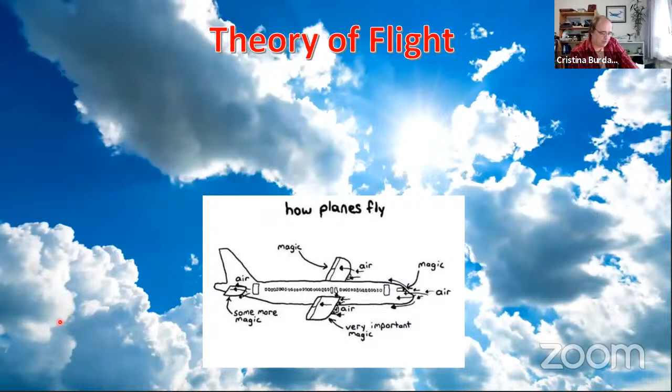Who am I? I work at Pilatus Aircraft Limited. I look after aircraft performance from design, development, certification to operational support. But I'm obviously just one of many, many engineers.

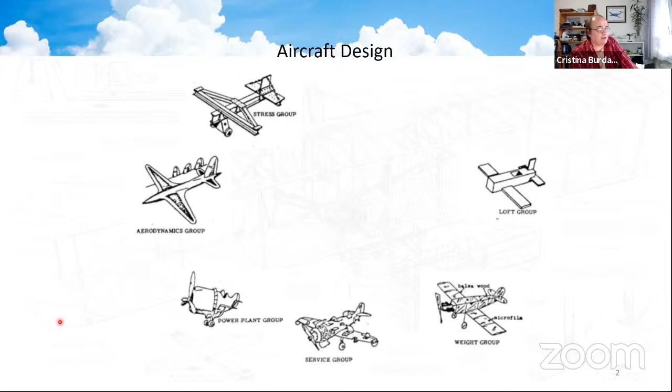In aerodynamics, we love our airplane to be sleek, smooth, rounded, so the air gets out of the way and lets the airplane through. But when we give our drawings to the loft group, they look at what they can draw and produce, and invariably it looks a little different. When the stress group get involved to make the aircraft nice and strong, they obviously prefer something with iron girders, and you can imagine how this sort of builds up. If they have iron girders, it's all heavy, so we need to get the weight group in there to make things nice and light again. So we keep fighting with various groups - it's a cooperation, it's a very difficult birth. As you can see, the power plant group, they only think about one thing. So airplane design is a compromise.

Now, I am presenting this from one point of view only - what you're going to see tonight is from my point of view. I'm not representing the company I work for at all, nor any aeronautical bodies. I got dragged into this by people asking me questions about things getting reported in the press, and I thought it'd be good to get an understanding out to the general population. I thought, Wombwell Historical, where else are you going to get - I thought you guys would actually be quite a good audience for this presentation.

So we're going to talk a bit about the science side. Where I'm going to start is on the subject of lift, but I'm going to touch on the historical part by starting on a grassy knoll in Yorkshire, where the landowner, one George Cayley, who had been studying aviation for decades - many aspects of aviation, he loved watching birds and how things flew - when he was about 80 years old, came out with a design, this governable parachute. This is circa 1853, in Scarborough, Yorkshire.

And he was a bit old to get into this thing, so he volunteered his coachman, one John Appleby. The reason he did that, at least the story I've heard, is that this glider was going to be pulled by a horse because he wanted to demonstrate the forces of flight. And it actually flew - it flew 900 feet. It crashed.

Mr. Appleby was given basically what looks like a boat with spoke wheels and a tiller. This was actually meant to supply control, so he could try to make this vehicle pitch up, pitch down, go left or go right. But I can imagine it offered him no control whatsoever. It crashed after 900 feet, but John Appleby, the coachman, survived. By the time George Cayley managed to get over to speak to him, he had a great big grin on his face that this machine actually flew.

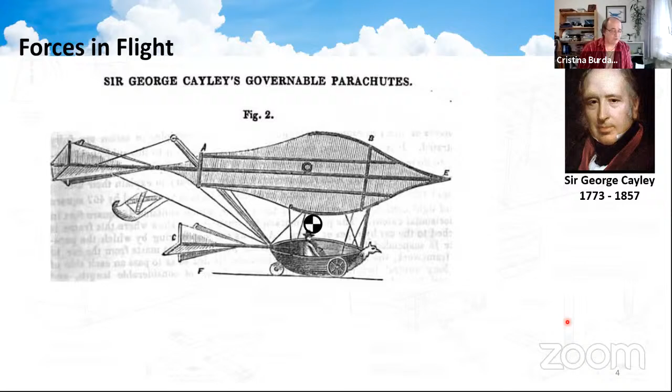Now, this is where the forces of flight come from. George Cayley determined that if the heavier than air machine had a center of gravity roughly where the person sits, it must have a weight acting down.

Then, from Isaac Newton's theories, applying Newton's third law of motion, to every action must be an equal and opposite reaction, if this vehicle is to fly level, there must be a force called lift acting in the opposite direction.

For the non-physicists, Newton's third law is basically the one that says never ever kick a door, because a door will kick you back with equal and opposite force. So you'll know about it that way, but the physicists will understand Newton's third law: to every action there is an equal and opposite reaction.

To generate the lift, the vehicle needed to move forward in the air, and there were some experiments that George Cayley did on that, which I'll get to briefly.

But how was he going to do this? He was going to do this by using a galloping horse to drag this thing forward and give it some thrust. But again, applying Newton, there must be a force equal and opposite to that, which he called drag, which would prevent the aircraft from flying faster and faster or slower and slower. It would fly at the same speed.

And these are the forces that we use. This model is basically the core of my work, to tell you the honest truth.

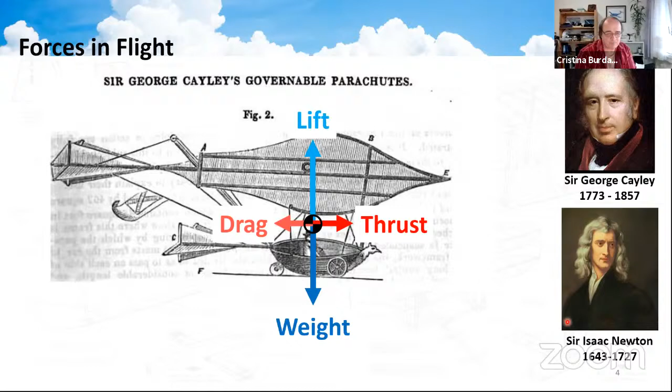Now, you might think this is a flight of fantasy, but now you guys are getting out of lockdown, try going up to the Yorkshire Air Museum, because there is a mock-up of this. It's not the original, because the original finished up in pieces, and they do fetch it out on a nice, fine day.

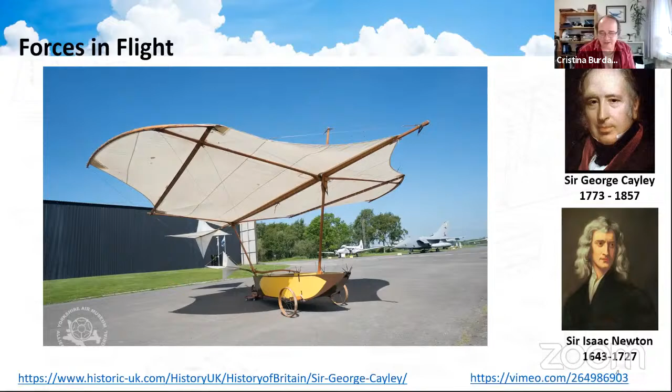So moving on, I want to take these forces and look what happens. If the vehicle took a second person on board, increasing the weight, then the lift must increase as well for the vehicle to stay straight and level.

But the thing you don't see is there is a connection between the lift and the drag. As lift increases, the drag must increase. That's the way it works.

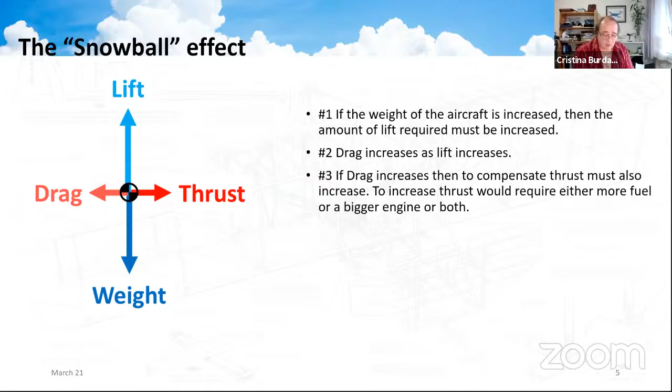But if drag increases, you're going to have to increase the thrust. Now, on an airplane, that means either opening the taps, putting in more fuel, or putting in a bigger engine, or both. But all that means is you would actually increase the weight. And of course, that brings us back to the beginning.

So it's a very difficult, very tender relationship. It's a love-hate thing that goes on. But fortunately, this process is reversible. As your vehicle gets lighter, as you consume fuel, then the aircraft will go faster. In fact, you probably have to finish up pulling back the throttle in some cases.

Now, that's all okay, that's what lift is. But where does it come from? So there are a number of theories, when I was studying, about where lift came from. And to explain this one, this is a longer path or equal transit time.

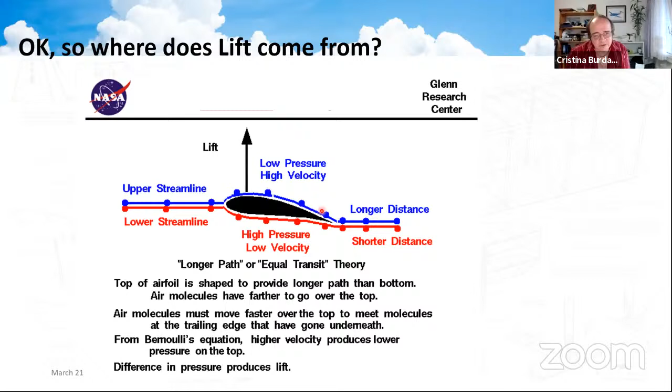So air is offered to the aerofoil, and the air particles - the blue line goes above, the red line goes below - but they meet together at the end of the aerofoil. They separate at the start, but meet again at the end. Now, when I was being taught this, I was thinking, how are the molecules connected? Is there a rubber band or something? Anyhow, this is a theory we were taught: because you've got to go a further distance on the upper surface, you'll go with a higher velocity. There was a Swiss guy, Daniel Bernoulli - and the Bernoulli family are very interesting - who realized that the higher the velocity, the lower the pressure. So on the upper surface, you had a higher velocity, lower pressure. On the lower surface, you had lower velocity and higher pressure, and the difference between the pressures provided the lift.

It is incorrect. Now, why am I telling you this? Because I was forced to learn this at university as if it was gospel. This is incorrect theory number one - there are several incorrect theories, and I learned them all. I have exam papers on them, and I don't know why I had to learn this.

Let's show you how this is wrong. I'm going to hand over to Professor Holger Babinsky at Cambridge University, who explains this very well.

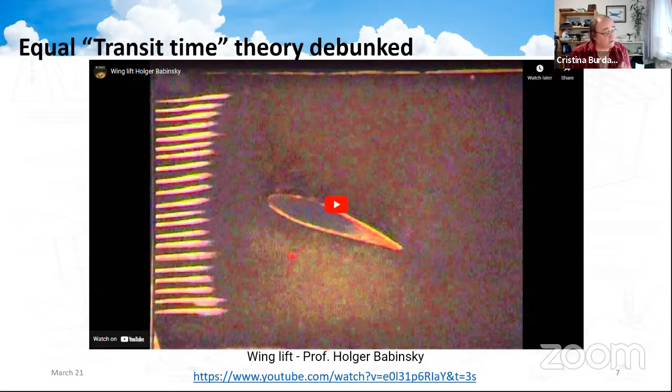It's often said that lift on a wing is generated because the flow moving over the top surface has a longer distance to travel and therefore needs to go faster. This common explanation is actually wrong. This video shows that the air on the top does move faster, but it doesn't reach the end of the wing at the same time as the air along the bottom.

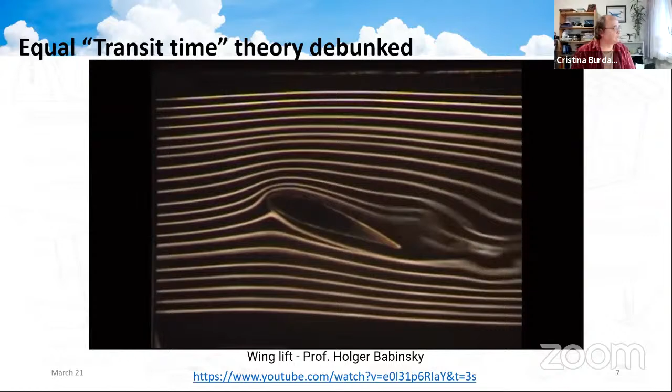Here we use smoke to visualize the streamlines around an airfoil. We can pause the smoke by briefly interrupting the supply. This gives us lines that travel through the flow, as we can see here. And if we now slow the video down, you can follow those lines, giving you an idea of how fast the flow is in different parts of the airflow.

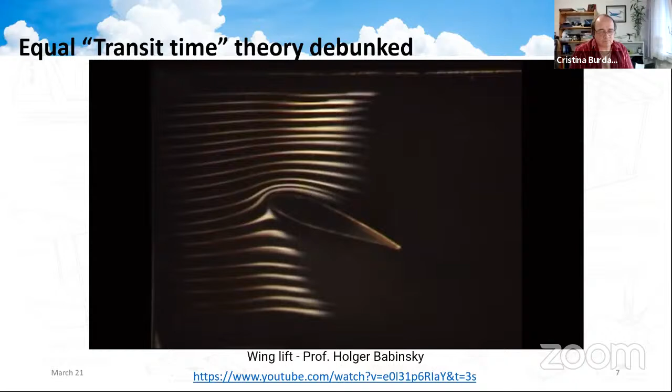Here you can see it speed up as it approaches the airfoil, moving faster over the top compared to the bottom. You can see that it reaches the end on the upper surface much earlier than on the lower surface. In fact, by the time it reaches the end on the lower surface, the flow has already gone a long way past on the upper surface. This shows very clearly that the flow doesn't take the same amount of time to reach the end of the wing.

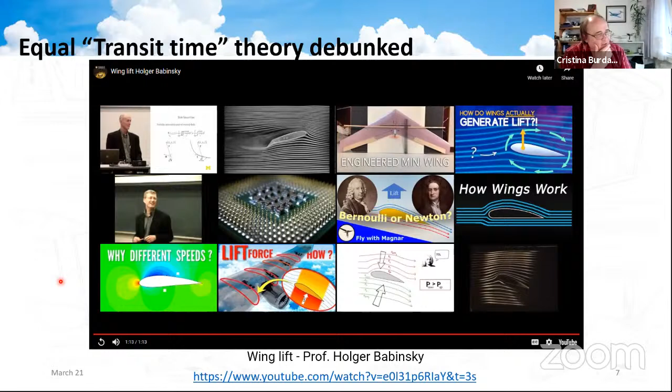Okay, so in fact, it's even faster - that disproved the theory I was showing you before. As I said, these were theories I had to learn, instead of learning how lift is really generated. I'm going to attempt to explain to you guys tonight in about 3 minutes how lift is generated. And if I fail, trust me, Prof. Babinsky has got more videos - it'll take about 20 minutes to explain it, but it's worth listening to.

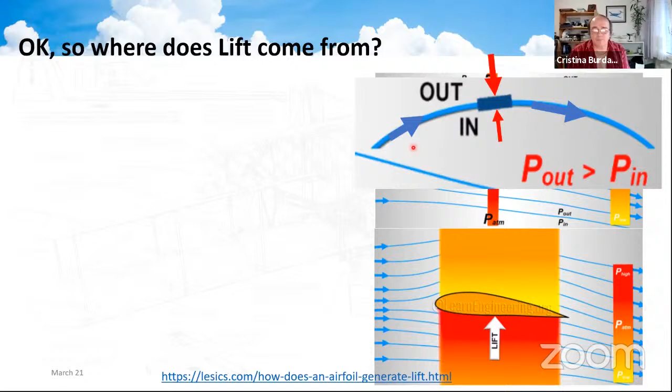If you recall, the flow around the airfoil - imagine these lines as smoke particles - causes the flow to bend around the aerofoil in a downwards fashion. If we look at this closer, that means as the particle of smoke is going along the arc, the pressure on the outer part of the arc must be greater than the inner part. If it was the same, the particle would continue in a straight line, according to Newton. And if the pressure on the inside was greater, the particle would deflect upwards. So we know the pressure on the outside of that arc must be greater than the pressure on the inside.

If you imagine we're far enough away from the airfoil at the top that we are at ambient pressure, that means each time we're coming in, we are reducing pressure - this pressure is greater than this pressure, is greater than this pressure, and so on. So on the upper surface of the wing, we actually have a lower pressure than atmospheric, and the opposite argument can be made for the lower side - you get a higher pressure than ambient there. So the lift is simply the difference between the pressures between the upper and the lower surfaces. The incorrect theory you saw before has the right explanation, but achieves it the wrong way.

And yes, you only get lift if the flow bends. If the flow doesn't bend, the only thing you're getting is drag. The flow will bend based on the speed of the flow and the shape of the objects in the flow. And that, in a nutshell, is where lift comes from.

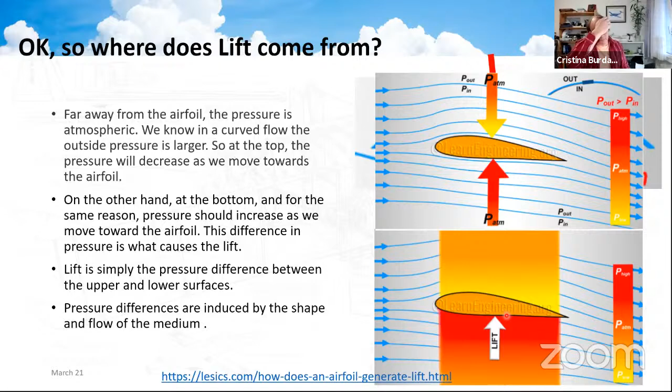Okay, so now I think I've given you enough on the physics side with regards to lift and the importance of weights. What I want to do is bring you bang up to date now, and we start talking about emissions, because this is a very topical subject at the moment, and people are making some extraordinary claims, and we're going to be examining some of those claims.

So what are emissions? If you imagine jet fuel as a hydrocarbon, so that's basically carbon and hydrogen atoms joined up in the molecule. From fossil fuel, we get a lot of impurities, and one of the main ones is sulfur. In the other end of the engine, we throw in nitrogen and oxygen, basically air. So out the back, you're expecting to see a combustion process which produces carbon dioxide, water, and sulfur dioxide from the impurities.

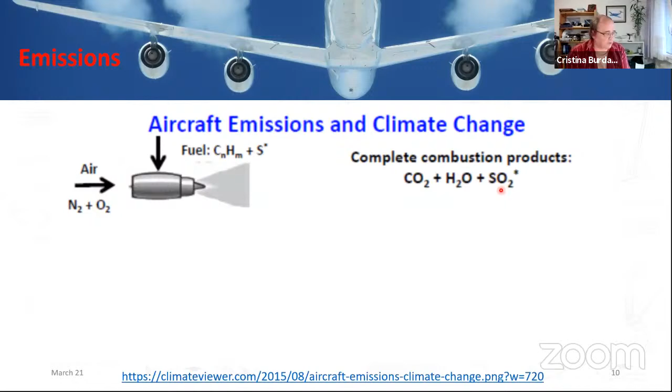But in fact, what we get are several other things. We get oxides of nitrogen, oxides of sulfur. We get unburned fuel, which is hydrocarbon. We get carbon monoxide. And in some cases, you can get black carbon, which is soot, just carbon.

Now, what's extraordinary, I find, is looking at this figure on the right-hand side: for every 1 ton of kerosene we throw in, we produce 3.15 tons of carbon dioxide and 1.24 tons of water. The other emissions that come out the back of the engine are relatively small, but we put in 1 ton of kerosene, burn it, and we're getting more than 4 tons coming out the back of the engine.

You can't create matter, can you? Well, let's examine this a little more carefully, but this means I'm going to be pushing you on a bit of organic chemistry, and you might have some nightmares about that.

So kerosene, there's no simple molecular description for kerosene. It's made from hundreds of different hydrocarbons - paraffins, olefins, aromatics. There's no simple formula. And on top of that, in the aviation world, we throw in things like icing inhibitors, because we can't afford the fuel to ice up. We throw in corrosion inhibitors, because we don't want it chewing our tanks. And biocides, because we don't want algae growing in there. So it gets very difficult to examine it from a pure chemistry point.

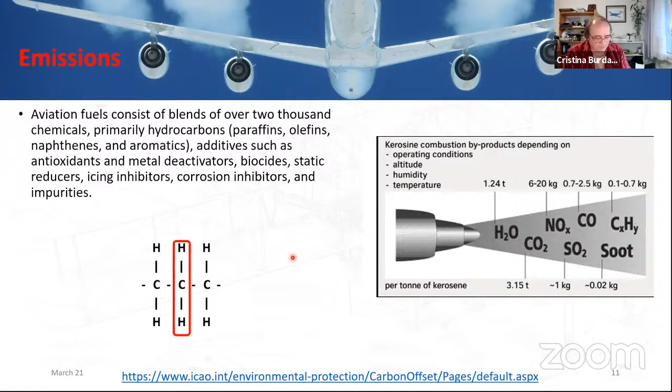But what I'm going to do is simplify the problem even further. I'm going to just take one segment and plonk it over here, and we're going to start looking at some molecular weights. So if I look at the hydrocarbon here, CH2, and add up the atomic weights, I'll finish up with 14 units. If I now look at replacing those hydrogen atoms with oxygen atoms, I'll finish up with 44 atomic mass units. And if I divide this 44 by the 14, I'll finish at 3.14, which is very close to this 3.15 value.

I do the same with the water, because the carbon here, the hydrogen's got detached, oxygen's gone there, and now the hydrogen will attach to oxygen, forming water. And I get similar values again - I'll get 1.28 compared to 1.24.

Now, anyone who does carbon offsetting will see a figure of 3.16 in the aviation world, maybe 3.15 elsewhere. So this figure, 3.16, you multiply by the weight of fuel that you are consuming, and that tells you the amount of carbon you need to offset. So if anyone looks into carbon offsetting and sees this number 3.16, it is not a made-up number.

It has some chemistry behind it. I have oversimplified the thing tonight, but it gives you broadly a correct number. There could be some other influences in there. They may have considered adding, well, we've got to consider the airports, the fact that we've got concrete on our airports and things like this. I honestly don't know, but 3.16 is the figure that's used in the aviation world.

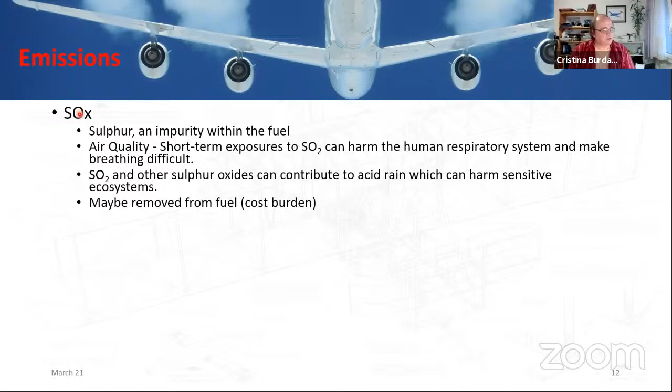Nitrous oxides, well, where does the nitrous oxide come from? Nitrogen is normally quite an inert gas, but it's formed by combustion. Once you heat or set fire to something, nitrogen gets rather excited and will want to bond, and it's formed by this combustion process. Nitrous oxides have a huge influence on our ozone layer.

In the upper atmosphere, towards the stratosphere and so on, ozone - you may remember, well, we want ozone layers because it does things like block the ultraviolet radiation. You may remember from the past we had the problem with aerosols eating into our ozone layer. But we don't want ozone at the lower layers. In the lower layers, together with interaction with other chemicals, it forms smog. And again, we're back to air quality and being able to breathe.

The thing about nitrous oxide is it also gets formed naturally, and it gets formed, as I say, in combustion. So it also gets formed in things like lightning flashes. And maybe Simon, our weather chap, can talk about this a little bit later. But as far as I can tell, there's more than 1 billion lightning flashes across the planet in any given year. In fact, you can see a lot of activity in various places. So a lot of nitrous oxide gets formed in the atmosphere naturally.

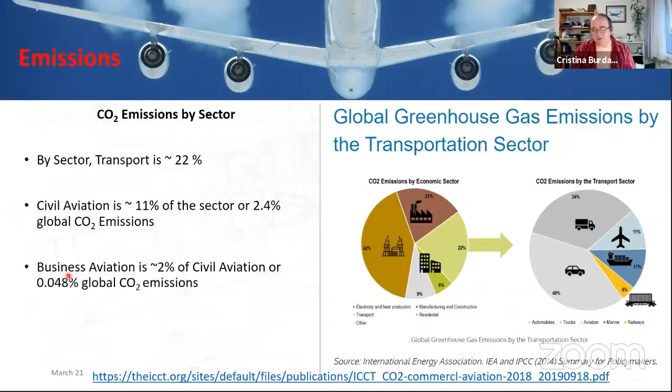When I look at numbers, I like to have some sort of feeling, some sense of those numbers. When they're so big, you normally lose all sense of feel for them. COVID has actually hit the numbers quite hard, but I'm not worried about what COVID has done at this point. I want to focus on the 100 billion gallons.

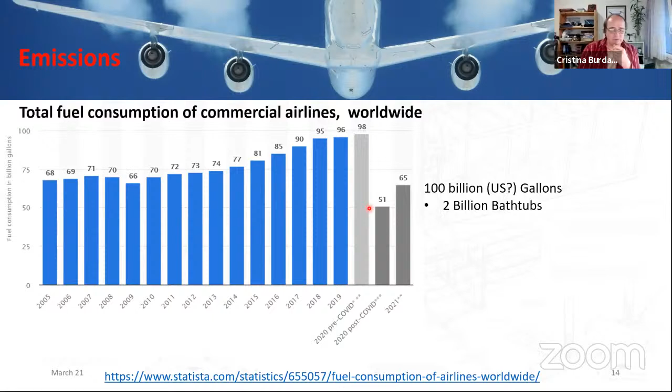Now, if you accept what I was saying before, that aviation is 2.4% of global CO2, then what we're putting into the planet is 3,585 Chew Valley water reservoirs worth of fuel, or 264 Lake Vyrnwy's.

So when people argue to me, oh, how arrogant is man to think they can influence the climate, I struggle, because I don't see how we can't be affecting the climate. And remember, this is just one year's worth of carbon dioxide we're pumping out. We've been filling the planet since the Industrial Revolution, 250 years ago. And yeah, it's huge. So what are we going to be doing about it?

I want to introduce you to an organization called ICAO, the International Civil Aviation Organization. They are the United Nations of the aviation world. They set out global policies and mandates, and each local authority — like the Civil Aviation Authority in the UK, or the Bundesamt für Zivilluftfahrt, BAZL, in Switzerland — can define higher standards than what's set at international level, should they so desire.

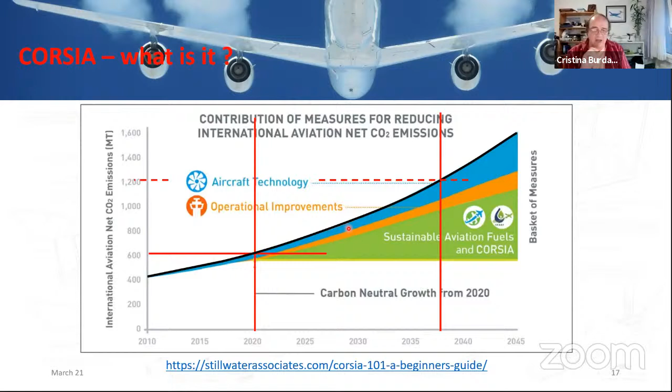Well, what the aviation sector said was that they want carbon neutral growth. How are they going to achieve that? They're going to use a basket of measures. In that basket we've got aircraft technology — we're going to try to make the aircraft lighter. You saw the importance of weight earlier.

We're going to try and improve engines. As you saw, we have unburnt fuel that's managing to get through the system. We're going to try and improve how the fuel is consumed, and try to make the aircraft cleaner. So aircraft technology — we're hitting this every time. We're always trying to improve, but we were always trying to anyhow. Now we just have more emphasis.

If you go back to the disclaimer I had at the beginning, where we have this set theory with all the engineering teams — on the right we had the loft group, production group. If you want to make your airplane cheaper, you push the scale that way. But if you want to make your aircraft more efficient, you push it back the other way towards me, in aerodynamics. That's one part of our basket of measures.

Operational improvements. There used to be a time when you'd be in the airplane waiting to take off, and when you arrived at your destination you could be put in a hold. That doesn't happen anymore. Now when you go to take off, there's only 2 or 3 airplanes in front of you, not 10 or 20 like before. And you can only take off if you've got clearance to land, so you don't hold at destinations anymore, which means we burn much less fuel.

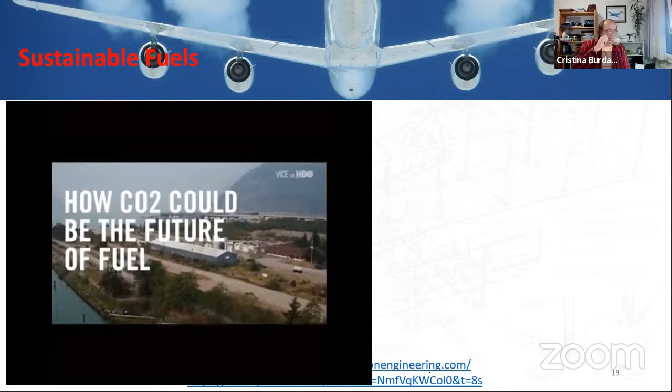We would like people to be recycling their fuel in the same way as they recycle other things. Our technology refines that carbon out of the atmosphere, combines it with hydrogen from water. And then that's the same as gas or jet fuel? Yeah, it's chemically the same.

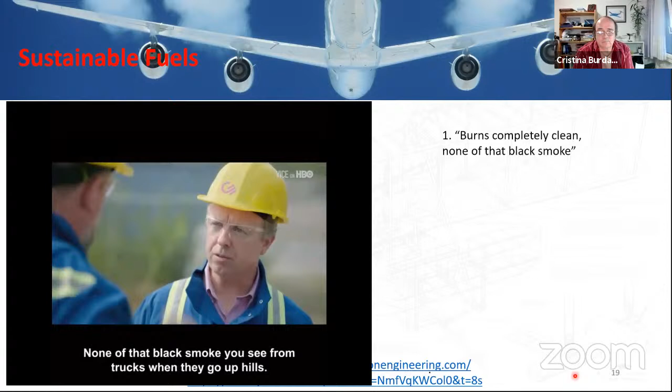No pollutants. For example, our diesel burns completely clean - none of that black smoke you see from trucks when they go up hills. Completely clean. But yeah, it's chemically identical.

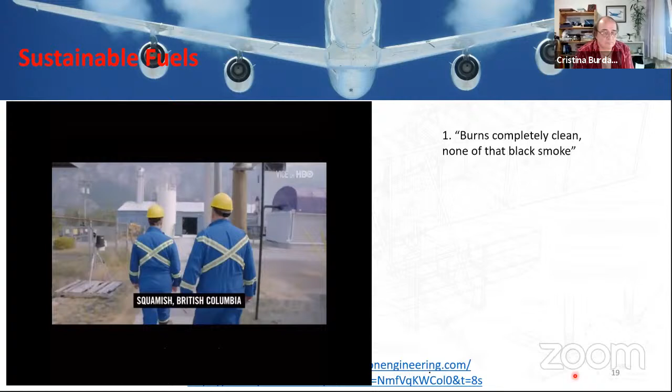So this is our plant. Great to have you here. Everything here is a working model, full process working, and we are capturing CO2 from the atmosphere right here. Think of it like a big cooling tower - a large fan draws the CO2 in, there's a chemical reaction, and we capture the CO2.

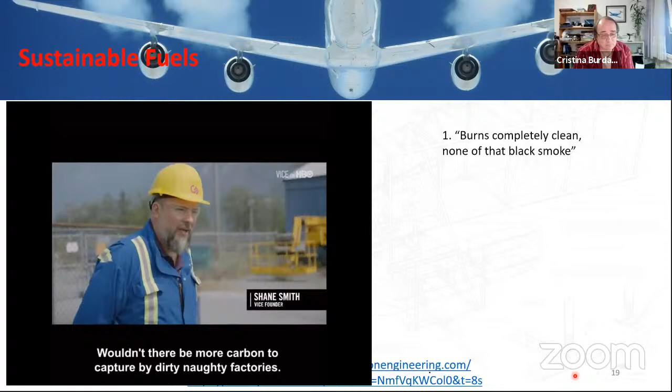Wouldn't there be more carbon to capture near dirty, naughty factories? No, it's uniformly distributed, so we could put one of these plants anywhere - in the middle of Beijing, or in the middle of the Sahara Desert - and you'd capture the same amount of atmospheric CO2. So we as a species have put it in, so we as a species should be taking it out. Well, that's our choice, but I think we have to, or find somewhere else to live.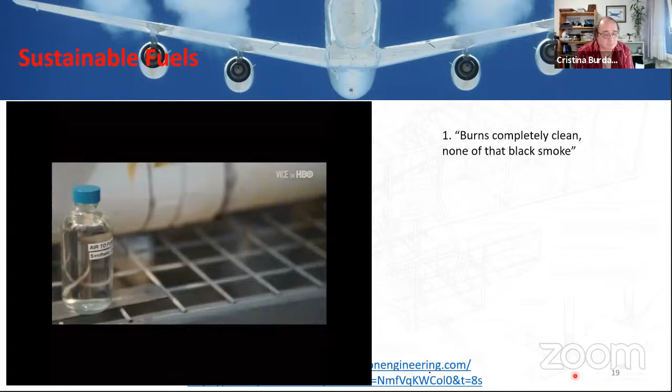This is the fuel that we make. It looks exactly the same as any other fuel. It's very, very high chemical performance - higher performance fuel than the stuff you buy at the pumps today.

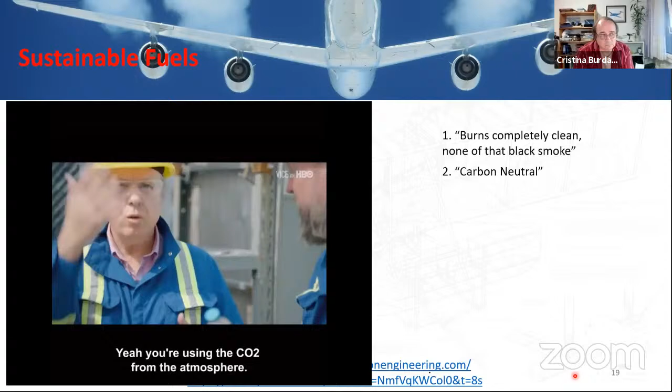So it's better than the pumps, it's carbon neutral, and theoretically it would be cheap to make because you're refining the energy that's already out there in the atmosphere. Yeah, you're using the CO2 from the atmosphere. Your only feedstock, the only thing you're consuming, is renewable electricity.

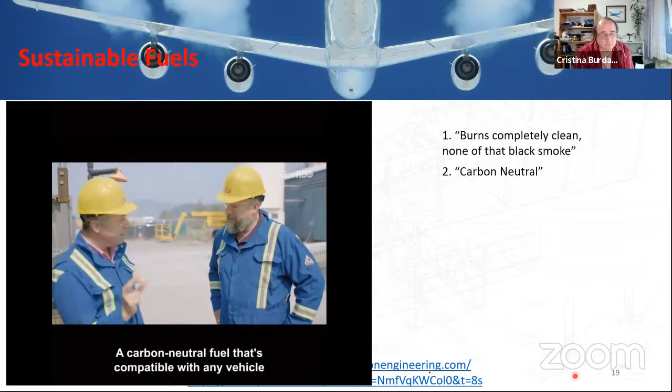But here's the interesting thing - a carbon neutral fuel that's compatible with any vehicle in the world today. So that car you just drove up in, we can make that carbon neutral tomorrow. Any vehicle, any performance vehicle, any battered old truck, aeroplanes - we're compatible with all of those. Which is significant because nobody's making electric tractors or electric planes. Do you have to do any modifications? No.

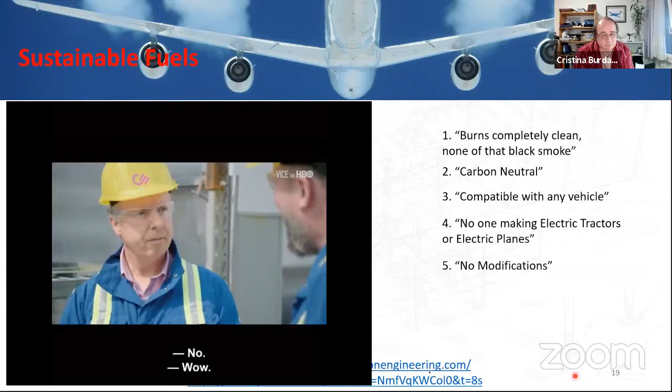So transportation is about 20% of the CO2 emissions. How are we going to decarbonize that? There's 1 billion cars in the world, so if we all go electric at $50,000 per car, that's $50 trillion. Then you've got to deliver energy and electricity to each car. It's a massive change.

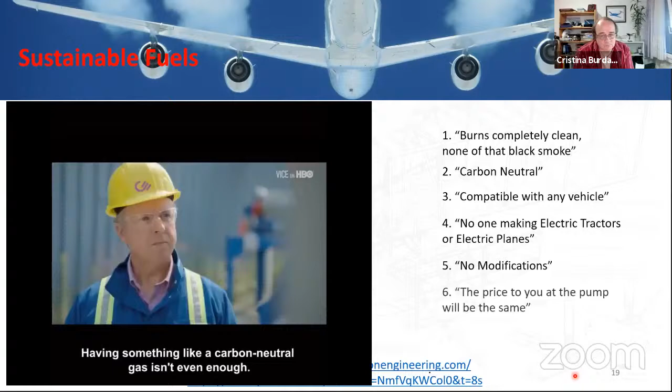Alternatively, why don't we just change the fuel? The price to you at the pump will be the same. Having something like a carbon neutral gas isn't even enough - we've got to start going negative, we've got to actually pull carbon out of the atmosphere. Now, can this do that?

And what's the plan? You can take the CO2 generated here and bury that underground, and you get to negative emissions. Right, it's a hugely important thing. And how many do you need to scale it to get to carbon negative?

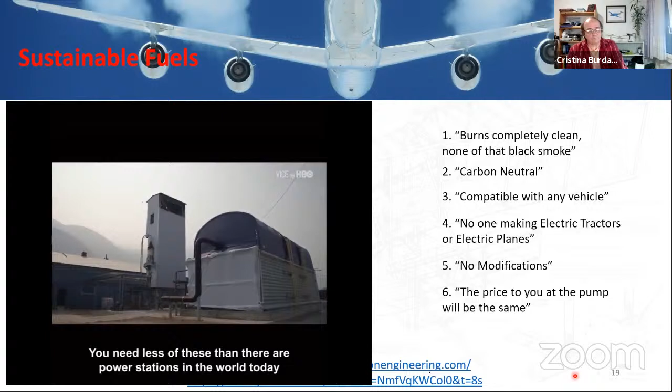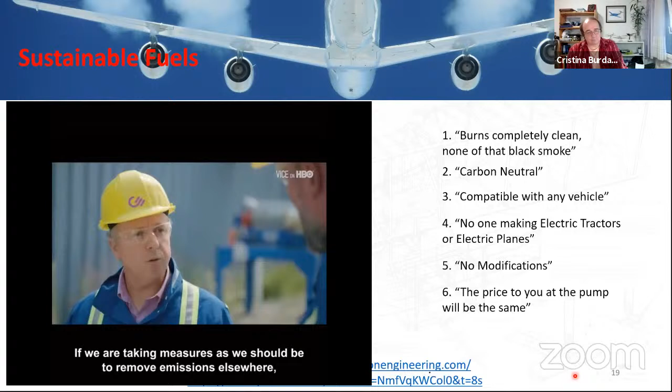You need less of these than there are power stations in the world today to net emissions out to zero. And how many is that? It's in the region of tens of thousands. If we are taking measures as we should be to remove emissions elsewhere, now you start getting to an overall negative emissions from the world.

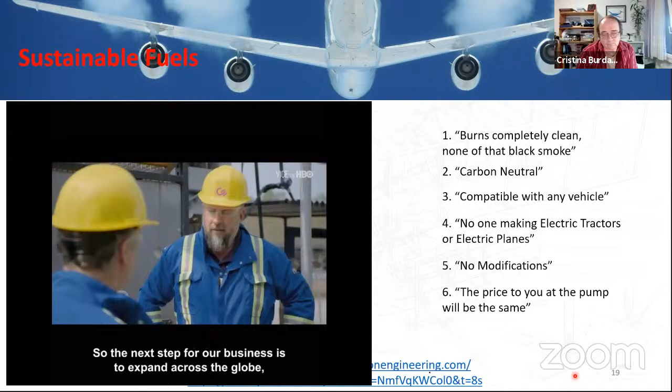Why isn't the world rushing to Squamish, BC and saying, can we please make 100,000 of these? So first of all, we're open and ready to receive the world. Secondly, we've really just got to proof of concept here, and it's working. So the next step for our business is to expand across the globe, make carbon neutral fuel, and when the scientists and the governments decide that they need to do negative emissions, the technology is ready.

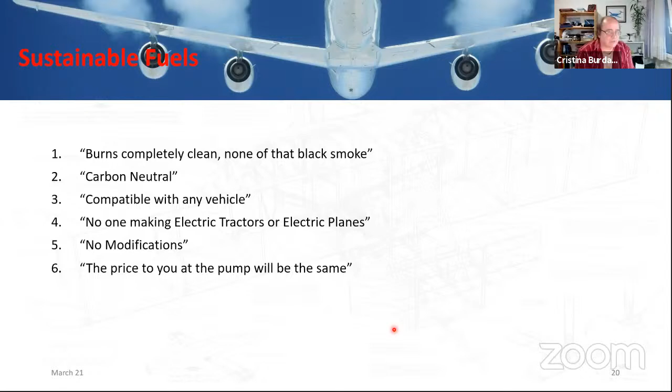Okay, so that all sounds really quite exciting, and I picked up on a few things I'd like to discuss. So let's go through some of these things.

Burns completely clean. Well, if I remember right, normally if a truck's burning black smoke, it's usually that the fuel is not burned properly or injector performance. This fuel will not solve fuel injector issues. It will burn differently, so it may not be as black. And he's not got in this fuel the impurities we have in fossil fuel.

So I'm hazy on this one because I understand where he's coming from in principle, but I would like to see this in a battered old truck going up the hill. And so I've got a little color code down here. So dark green is hazy. I think I know where he's coming from, but I don't quite agree 100% with him. And that's because I'm a pedantic person.

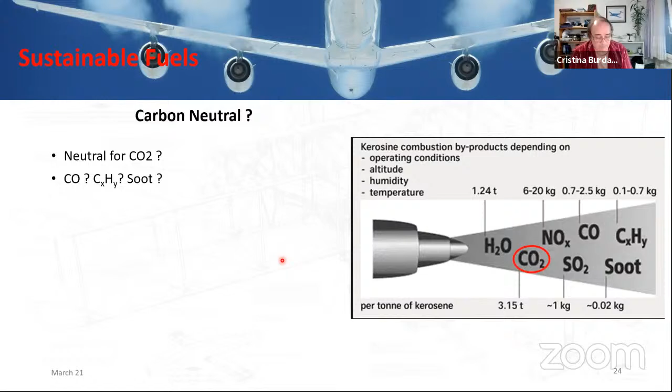Carbon neutral. Well, neutral for carbon dioxide, yes. But if you remember, we had other carbon sources. We had carbon monoxide, we had unburned fuel, and we had soot. So he's neutral for CO2, and CO2 is the biggest contributor. The other ones are less so, considerably less so. But again, if he wants to claim carbon neutral, I'm a little hazy because, again, there's bits of pieces of other carbon which aren't being taken out.

Compatible with any vehicle, as long as it meets the fuel standards of that vehicle, absolutely. And here, I'm in full agreement with what he's doing. No one makes electric tractors or electric planes. Well, that's an interesting one. Electric tractors, you can buy them today. You don't even need to sit in them.

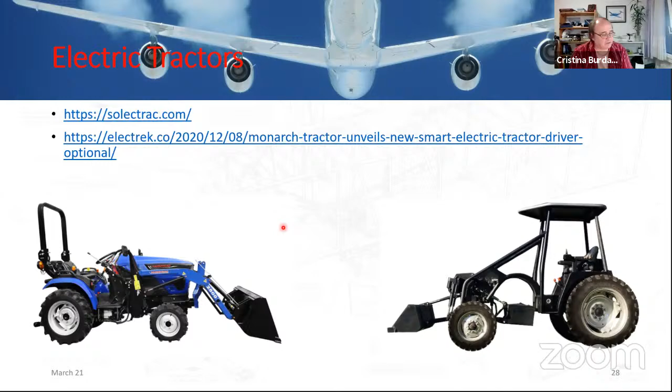I don't know when these tractors were available, and I don't know when Steve made his claim, but there are electric tractors out there doing some fantastic stuff. Electric planes, that's an interesting one. So let's have a look at electric planes. I'll get to the chart in a moment, but let's have a look what we got.

This is from Zunum. They have investment money, or had investment money from Boeing, but Boeing have run into trouble and pulled the plug. Zunum, at the moment, I don't know where they're going, what they're doing, and so that project at the moment is on pause.

This project over here, Alice, is an Israeli product. They had an unfortunate incident with their first prototype. No one was hurt. And the second prototype, I believe, is either about to fly or is flying. They're pushing ahead. It's looking interesting, but as an aerodynamicist, I do worry about the position of some of their engines. The really interesting one, though, is the airplane at the bottom.

This is from Airbus. It's the old, well, BAE Systems will get upset, but it's actually a Hawker Siddeley 146, but they'll say, no, it's a BA RJ 100 or something. What they're planning to do here on the 4 engines is take one engine out, convert it to a fan, which will be powered by an electrical generator. And this was going to be, if I remember right, 2 megawatts.

And this was quite an exciting program. And Airbus was scheduled to actually start flying this, I believe, this year at Cranfield. But they've cancelled this program because of COVID. And I think they cancelled it because they were probably pressed, because they probably finished up going back to their government looking for subsidies, because the airlines aren't earning money to pay back for their aeroplanes.

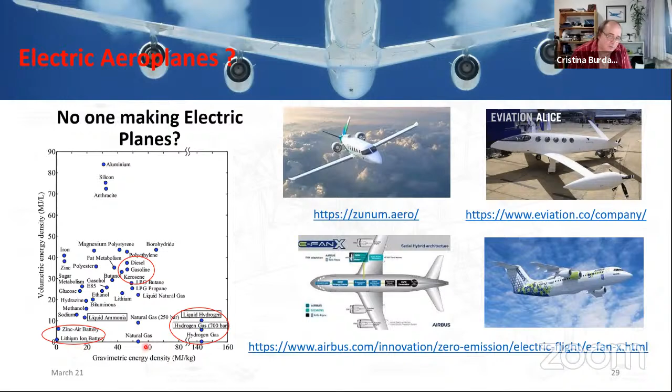But when you get to your destination, what are you going to do? You're going to wait the next day to charge the batteries? You're going to swap the batteries out? It doesn't, to me, it doesn't make sense as a business case. The air vehicle needs to be out there working as much as possible to earn its keep. So when it comes to electric aeroplanes, I have to agree 100% with the claim that Steve made. No one's making it work. They're trying, but it's not working.

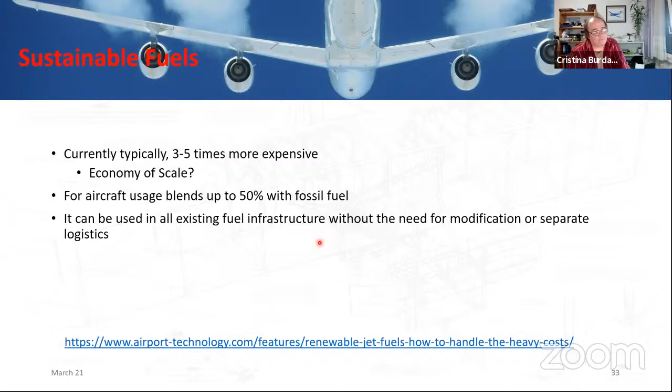Well, this isn't Steve's direct air capture. This is using biostock. But currently, they're 3 to 5 times more expensive. And we do blend them, which will help bring the price down a little bit. But at the moment, sustainable aviation fuel is not a big thing. It may come down with economy of scale.

There's companies such as Gulfstream who have been operating for over 3 years. They've done 550 flights, flown 1 million miles on sustainable aviation fuel. We need to prove that the fuel is not eating the tank, it's not eating the fuel system, it's not eating the engine, that it works. So we need to get a degree of reliability measurements into this.

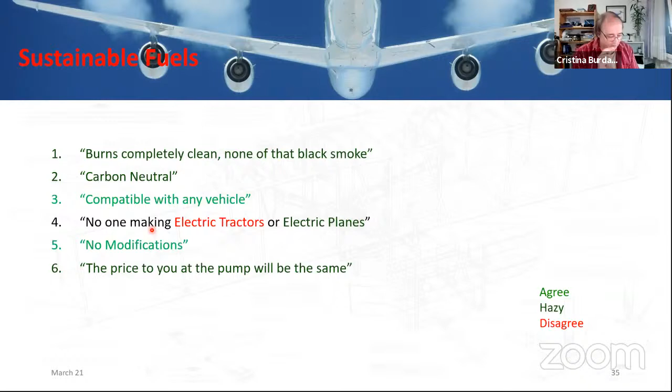So that's my take on what Steve's been talking about. The interesting thing on the direct air capture, though, is he will go to, or can take air carbon dioxide out of the atmosphere and bury it.

Now, ICAO, the other thing after sustainable aviation fuels was CORSIA. CORSIA is Carbon Offsetting and Reduction Scheme for International Aviation. And it's in the pilot phase at the moment, and it will be introduced probably in the next 3 to 4 years. And this means carbon credits. And carbon credits can be things like green projects, whether you invest into sustainable forest management or reclaim forestry, or invest into renewable energy projects. So there will be carbon markets, and you'll be encouraged to invest in them.

However, there is no managed, monitored, accredited system today. And in 2007, some chap in Hungary, well, I don't know where he was, not necessarily in Hungary, offered carbon offsetting for the Vatican in 2007. And he gave them a certificate. But the forest he said he was going to reclaim, which was in Hungary, never happened. And you can imagine how happy the Vatican are about that. And the Vatican weren't paying anything. This guy was just trying to get them on board to then advertise he's got God on their side.

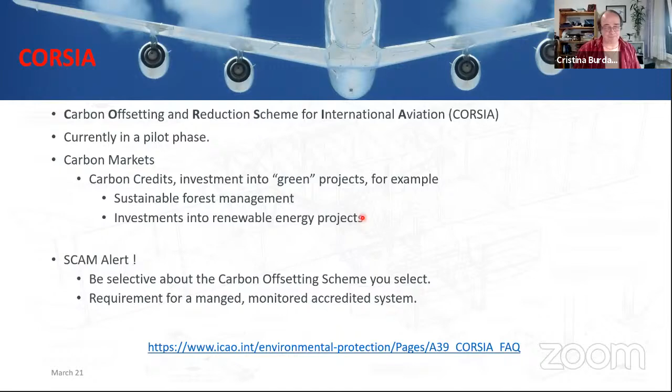And then what are you going to do? Normally the airplane gets turned around within the next hour or so for the return trip. You can't lose time for charging batteries, and you probably don't want to swap out the batteries. The technology isn't there today, but that doesn't mean the technology won't be there tomorrow. I do know they're working on, I believe it's called sulfur iron, which is a promising step forward. But they've got to do more than an order of magnitude improvement, and it's a hell of an ask.

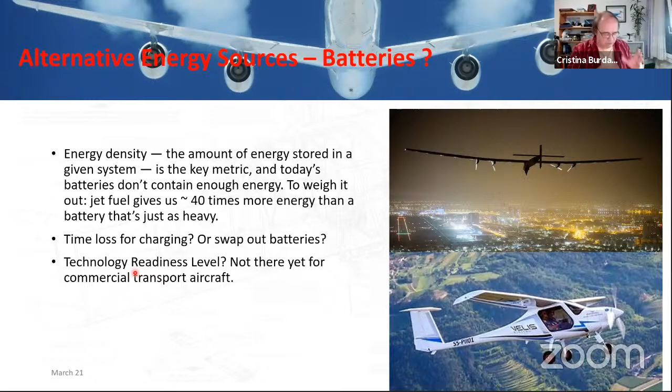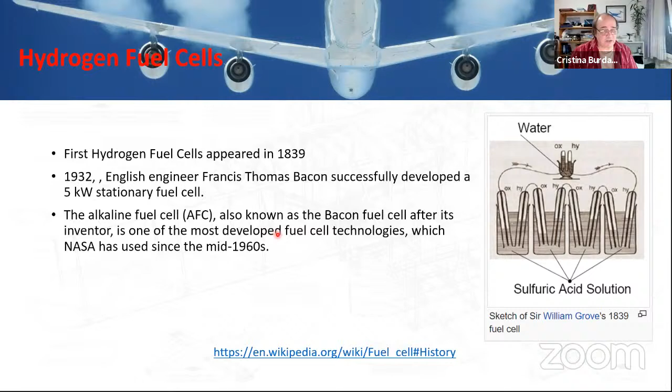So if we can't do batteries, if we can't store electricity on board, what about if we create electricity on board? Fuel cells. In fact, there's been a couple of fuel cell aircraft already. Boeing Phantom Works have created an aircraft which they flew a few times, and recently in Cranfield, ZeroAvia have been testing their aircraft. Hydrogen fuel cells have been around a long time, since the 1830s, and in fact hydrogen fuel cells in the 60s have been to the moon and back. So it's not a new technology, but to get the energy out for the weights that they will be is a difficult thing.

How do hydrogen fuel cells work? There's a very short presentation on that.

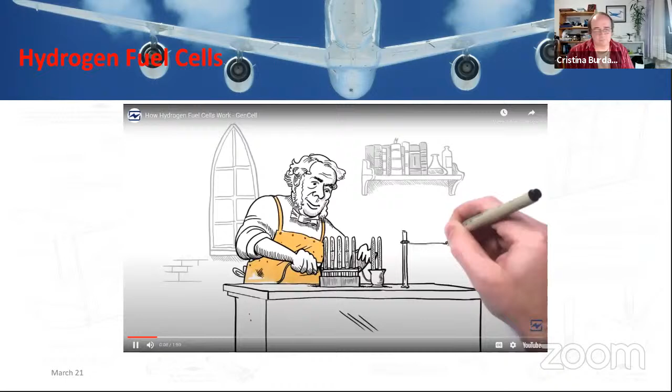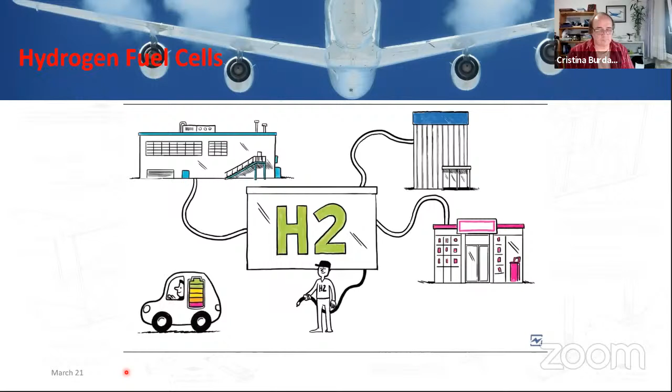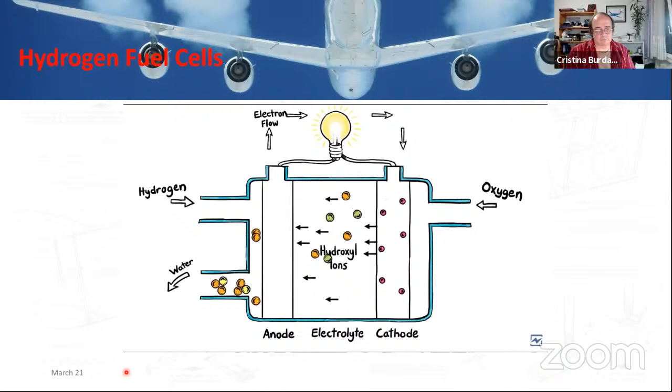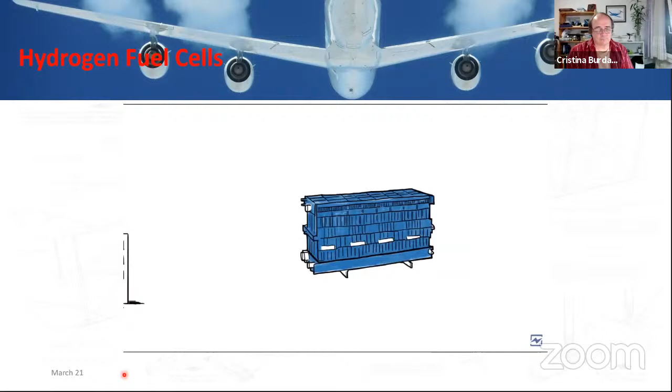Have you heard about the new sustainable energy technology called fuel cells? In fact, they're really not that new. Fuel cells were invented in 1839 by William Grove, and were developed by Pratt & Whitney and other companies in the 1950s. Safe and dependable, they were used by NASA and the Russian space program to power spacecrafts. Today, leading global companies like Apple, Verizon, and Coca-Cola use fuel cells to generate clean power. Honda, Toyota, and other car companies use them to power their new generation of pollution-free cars. So how do fuel cells work? Fuel cells use hydrogen and oxygen in a chemical process to produce electricity and heat. The only byproduct: pure, clean water. A fuel cell has two electrodes, an anode and a cathode, and between them an electrolyte. The catalyst on the electrode breaks the H2 hydrogen molecules to allow them to combine with hydroxide, OH negative ions, to create water and release electricity. But unlike batteries, fuel cells don't store power for a limited amount of time. They generate it for as long as you have hydrogen. As a source of backup power, fuel cells are much better than diesel generators. They aren't smelly or noisy, and they don't produce harmful exhaust. Fuel cells can be used anywhere you need backup power: mobile phone towers, electrical substations, manufacturing, and much, much more. Other green power solutions harness the sun or wind, but if you're caught up in a cloudy day, or on days where the air stands still, these solutions can leave you without enough power when you actually need it. That's why you...

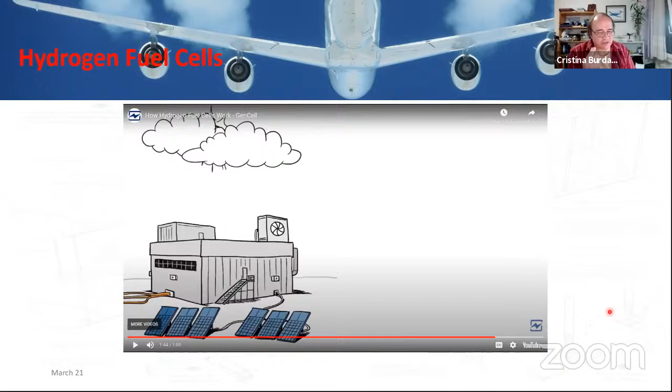I'll pause there, he's about to advertise GenCell, but I know my time's running out on me. So that explains briefly how hydrogen fuel cells work.

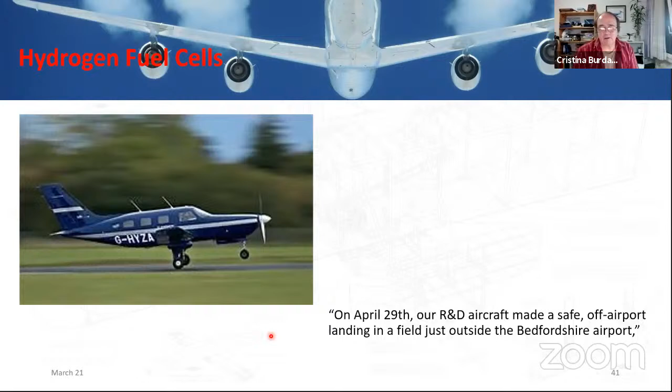As I say, there's an aircraft that's been flying, and it's actually now starting to look at a nice sized airplane, a business class aircraft, with 250 kilowatts of total power, about 300 horsepower, just over 300 horsepower. This was flying down in Cranfield, or I should say, was flying down in Cranfield. Just less than a month ago, they made a statement that their aircraft made a safe off-airport landing in a field just outside of the Bedfordshire airport. I'm not too sure normally what I would expect to see, but this is what a safe off-airport landing looks like.

The crew were absolutely fine. They were battered, but they walked away from this. The hydrogen was secured—you can see there's no burning or anything there. It may have been to the moon and back, but apparently it can't do a lap of Cranfield Airport.

Fortunately, these guys aren't deterred, and they are going to push on with the next aeroplane, because they had a family of airplanes they're going to work along. I look forward to seeing the work from ZeroAvia on this project.

That said, I do love the understatement here. You may remember recently SpaceX lost Starship serial number 10 on the pad. It landed, and after a few moments it actually exploded. But of course, SpaceX won't say it exploded. They claimed it underwent a rapid, unscheduled disassembly, and they do mean rapid. I love my business because we actually do enjoy understatement.

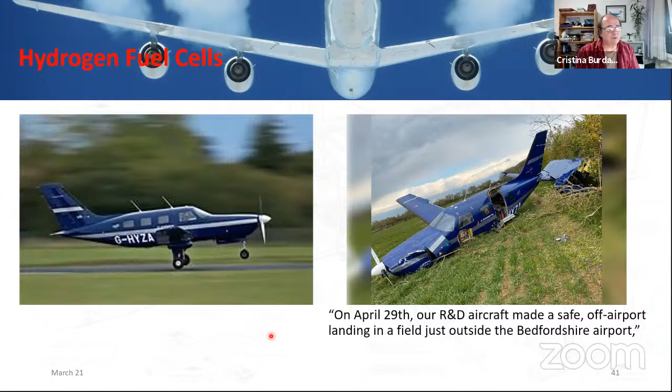So, okay, what about hydrogen itself? Well, this is why Airbus have stopped doing, or abandoned, their E-Fan-X program, the electric airplane we were looking at. And Pipistrel, who made that other airplane I showed you earlier, which is already certified as a battery-powered airplane, are looking to get into this market.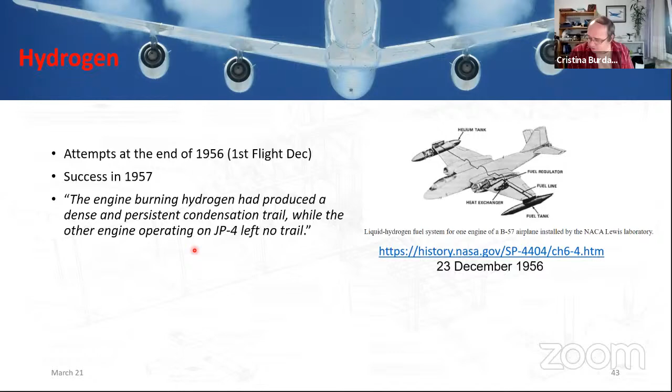So the project got shelved quite early. The Russians actually looked at it in a couple of aircraft, a passenger aircraft, but that was back in the 70s, I think. I must admit I don't remember exactly what happened there and why they abandoned it.

What's so special about hydrogen? I've pinched this from an Airbus presentation from 1999, and we're looking at liquid hydrogen. For the same energy content, by weight, I need 3 times less liquid hydrogen, but by volume I need 4 times more liquid hydrogen than jet fuel. And I need to find somewhere to put it on the airplane. We're talking liquid hydrogen, so I've got to put it at minus 253 degrees centigrade. Bit of a challenge.

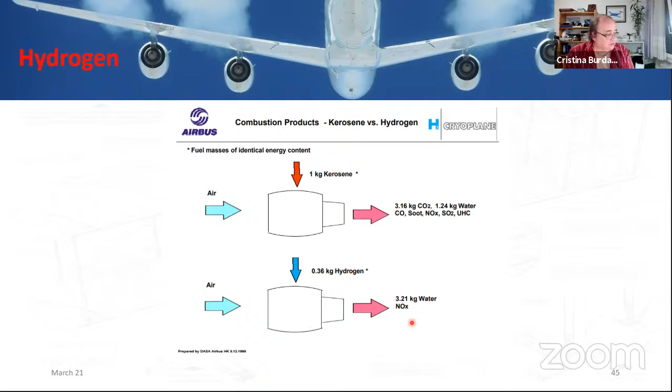Let's see what happens with an identical energy content. Burning 1 kilo of kerosene - you remember these numbers from before - gives 1.2 and a bit kilos of water, 3 and a bit kilos of carbon dioxide. For the same energy, you only need 0.36 kilos of hydrogen. There's no carbon dioxide output, there's no soot output, but we're producing 2.5 times more water, and because hydrogen burns hotter than kerosene, we're going to be producing more nitrogen oxides. That is a concern in this business.

What would it look like? This was a minimum change aircraft that they had proposed, so you're talking about hydrogen tanks on top of the fuselage. It's starting to look more like a Zeppelin, and the romantic in me loves Zeppelins. But they concluded at the end of the day they saw no real benefits with this. That was in 1999, 2000.

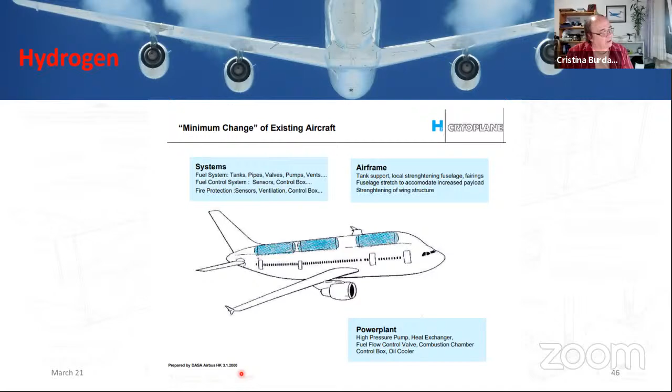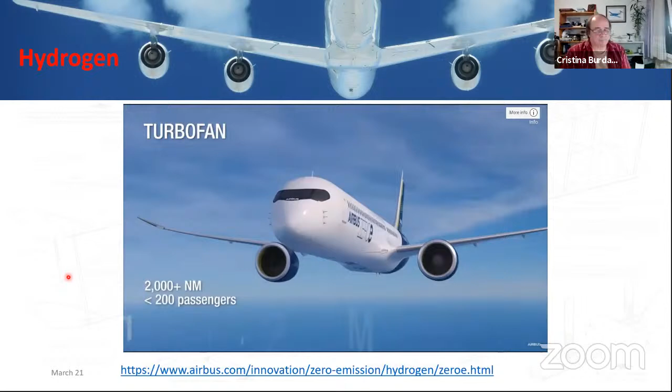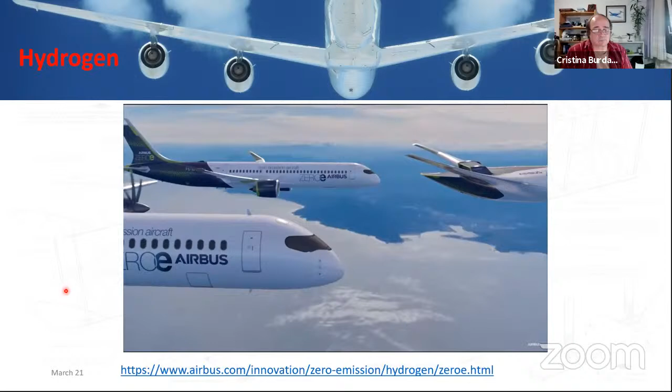Let's have a look at what Airbus think today. So Airbus are now saying we can do hydrogen, or we pursue hydrogen aircraft. It's a hydrogen hybrid - what that means exactly, I don't know. They're going to be mixing the hydrogen with another alternative source, maybe hydrogen fuel cells and so on. In that presentation, they talked about ranges of 1,000 plus and 2,000 plus nautical miles. Another day I'll tell you about the nautical mile and its definition, but today I've got to push on.

So hydrogen is not going to get us as far as we need to get. So, Simon, I'm getting there. Summary. So to summarize, just remember please, this is my opinions that I'm just sharing with you.

Sustainable aviation, we're looking at recycling carbon, whether it's bio-waste. One thing I think will be really interesting is algae or direct air capture, which Steve Oldham was talking about there from Carbon Engineering. What I do worry about is how big the plant has to be to produce the quantities of fuel required by the aircraft. There are desires that we move from a 30-70 split on blend to 100% sustainable aviation fuel, and we don't use fossil fuel anymore, but it requires proving.

Carbon offsetting, yes, it is good in principle and should be encouraged to contribute to reforestation or protect the forest, or support renewable energy sources. But we know at the moment there's no accredited system. We need an accredited system. We need someone like the UN to step in here and set up some sort of body to say what is approved, what isn't approved.

If you look at some airlines, when you book your flights, they offer you carbon offsetting. They tell you how they carbon offset. Some airlines actually do some good things. Some airlines do some bad things. The only thing I can say, and Steve will touch on it in some of his other presentations, Steve Oldham, is to make less trips.

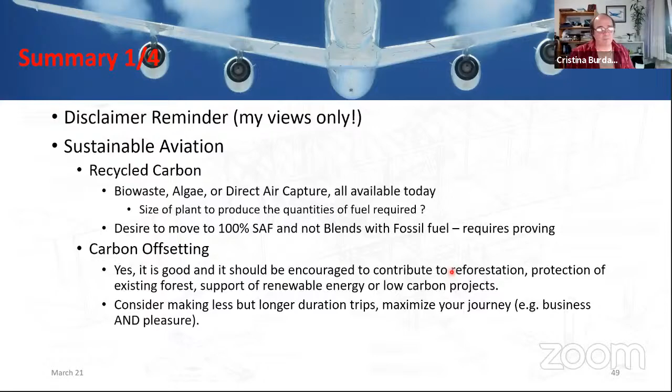Hydrogen, we looked at hydrogen. The problem with hydrogen is the nitrous oxides. Maybe that could be offset by burning in oxygen instead of air, because you're getting the oxygen from the hydrolysis. And then you're not burning it in air and not getting the nitrous oxide. But then you're going to be carrying more oxygen bottles, and it's all weight issues. I just don't see it working. I don't know how they're going to solve the nitrous oxide issues.

Plus hydrogen contrails, about 2.5 times more water. Clouds and global warming, maybe Simon can say something about this a little later. Clouds, they can trap the heat and warm - this is one thing we all know about. But we also know they can provide cooling to the planet. It's a love-hate relationship with clouds and contrails.

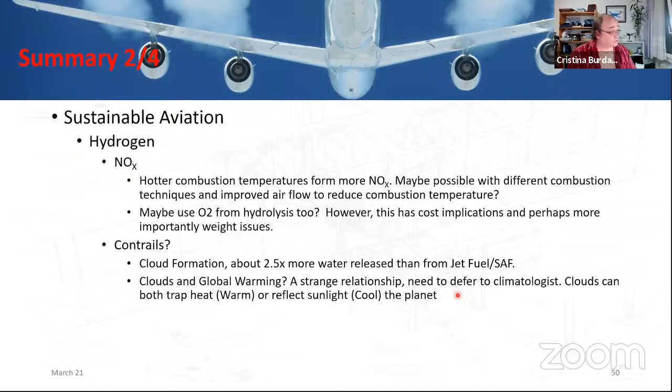And you've seen the range implications earlier. So batteries alone, we know just doesn't work. Maybe for small aircraft, like Simon flies around in Hackney Green or whatever it's called these days, for going to the business airport. Fuel cells and batteries for larger general aviation aircraft, that's something I think that may come, and I hope ZeroAvia pick themselves up and crack on with it.

But whichever path is pursued, expect costs to fluctuate. When CORSIA comes in, airlines are going to have to offset their carbon, whether they do this by buying sustainable aviation fuel or buying carbon credits on your behalf. Your ticket prices are going to go up. With hydrogen, you would have longer trips or stopovers, but maybe a tactic should be used: liquid hydrogen for shorter trips and sustainable aviation fuel for longer trips.

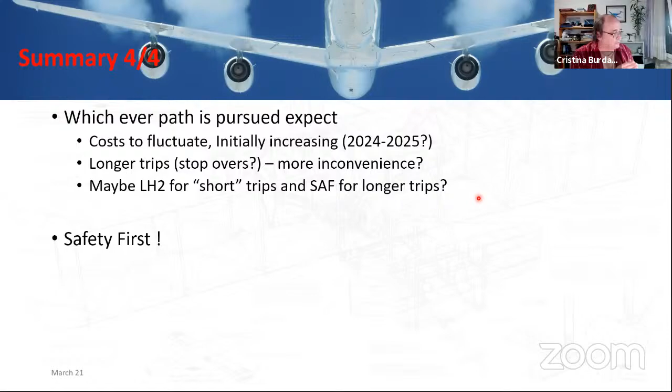But importantly, we can't do this in a rush. We're a safety-first industry, and it's not something we can take lightly. So it's not something we can change straight away. No, you can't just do this right now - it doesn't work that way. It's got to be proven. And I'm sorry I've taken too much time, Simon.

Thanks, Eddie, that was absolutely fascinating - no problem with the time at all, could have listened on and on to that. I think you've given us a whirlwind tour there of aviation and where it's going in the future, and the considerations we all need to have. Certainly lots of interesting points made, and lots to ponder for the future.

If anybody's got any questions, please do post them in the chat, either on YouTube or in Zoom. We've got one coming from Ian Sadler saying, what do you make of the claim that the Wright brothers weren't really the first to fly? The launch ramps they used means they were aided, and the first real unaided flight was by Santos Dumont in France. Interested to know what you think of that, particularly given what you said about George Cayley and how that fits in with things. So what do you think of that, Eddie?

I'd actually have to go back and check on that one. Yeah, it is slightly debatable. The Wright brothers get the popular vote - they're the ones that appear left, right and centre. That's all I can say on the subject, to tell you the honest truth, though I'm sure there are others. Is it a definition of what flight is as well? I suspect it is. The Wright brothers claimed the first powered flight, I believe.